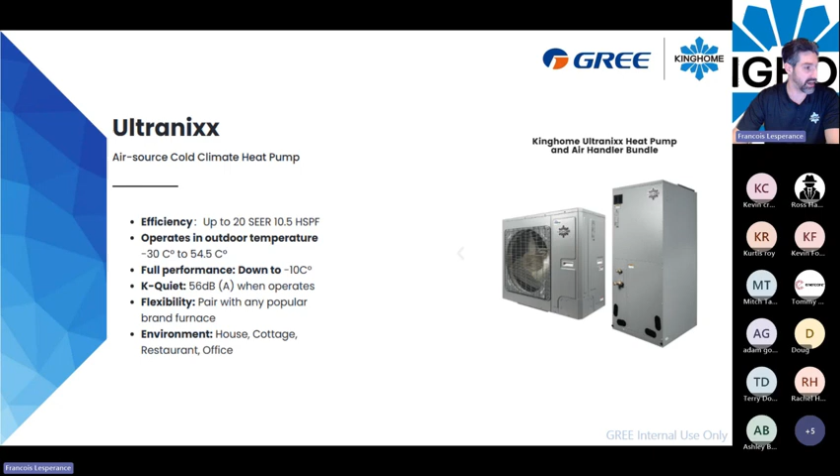So in that heat pump, you have a two-stage inverter compressor, and it's really a good compressor, really reliable. It can go, as I said, to operate like 100% of its capacity at minus 10 degrees Celsius.

This unit is fully 24-volt compatible. So even through your thermostat to the outdoor unit, it will be a 24-volt connection. There's no communication line on this unit. So all you need to connect is your 24-volt wire and your high power wire as well.

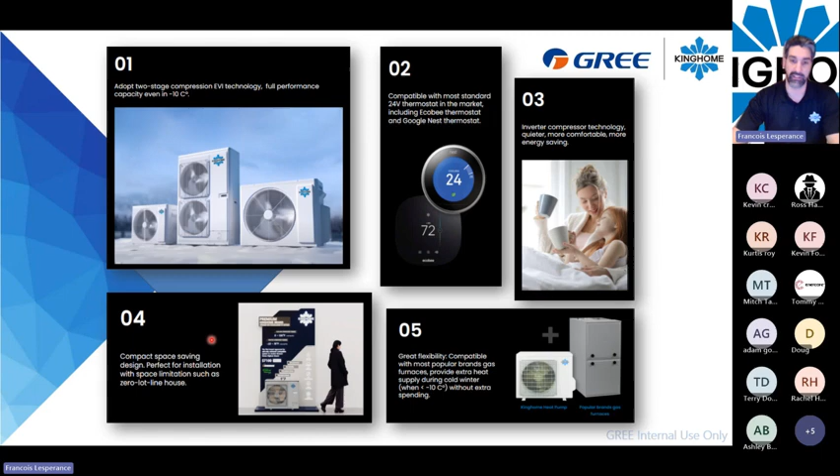And it's compact. It's not like those whole big heat pump systems that you will have on the side of your house. So this one is side discharge, so it will be very flexible, and it's very fun to install as well.

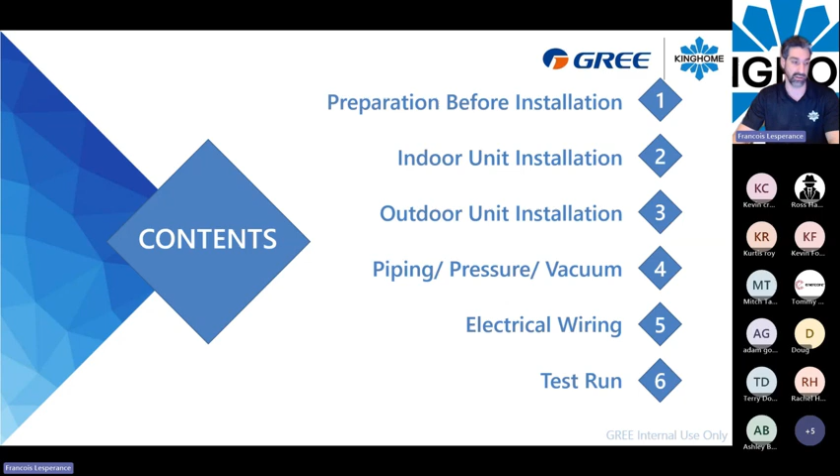So today we're gonna see how to be prepared for your installation. We're gonna walk through the indoor unit, the outdoor unit as well. We're gonna take a small review about the piping, pressure, vacuum, all the stuff you need to do to be done perfectly when you want to do a good installation. We're gonna see the electrical wiring, and at the end of the presentation, it will be a test and run, how to control and make the startup for the unit, how to program all the stuff via the dip switches, and how to make it work correctly.

So first thing first, every time you will do a job, make sure your ductwork and the equipment is compatible with your load calculation. This is according to the ACCA Manual J residential load calculation. You need to match a good load calculation from the house you're about to install the unit in. If it's undersized or oversized, it will surely not be efficient enough in cooling or in heating. Just be sure that you will have the right ductwork, the right amount of CFM running through this unit.

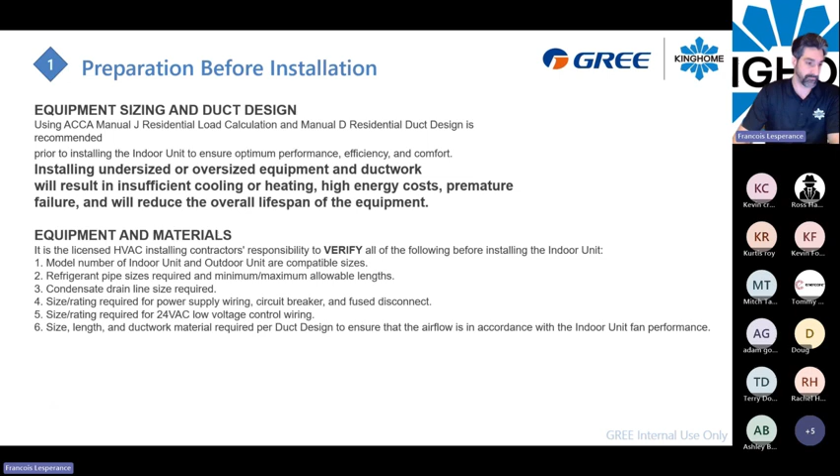So when you are on site, you want to make sure that when you locate this outdoor unit or your indoor unit, you will be aware that the noise will not disturb the neighbor, to have proper ventilation around the unit, to make it a strong and safe installation, away from flammable corrosive gas, away from strong wind. This is the one I want to highlight a little bit, because in heating mode, you just want to make sure that you don't let the wind make the job of the outdoor condenser fan. So just be aware that being away from strong wind is important, away from objects that may generate noise, and high enough to have easy condensate drainage.

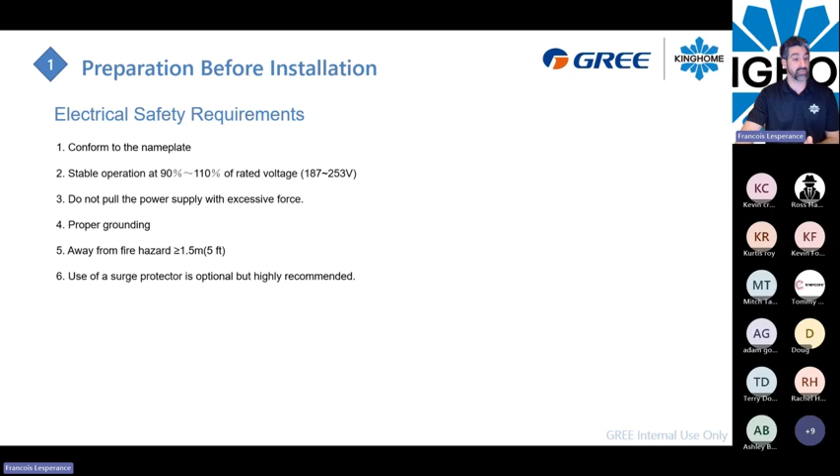When you do your electrical stuff, well, safety is a thing. So always make sure you conform to the nameplate of the unit. You will have a stable rated voltage. It can be as low as 187 to 253 volts, so be sure the voltage is stable. Always make sure you have proper grounding also. This is very important. And the use of a surge protector is highly recommended too.

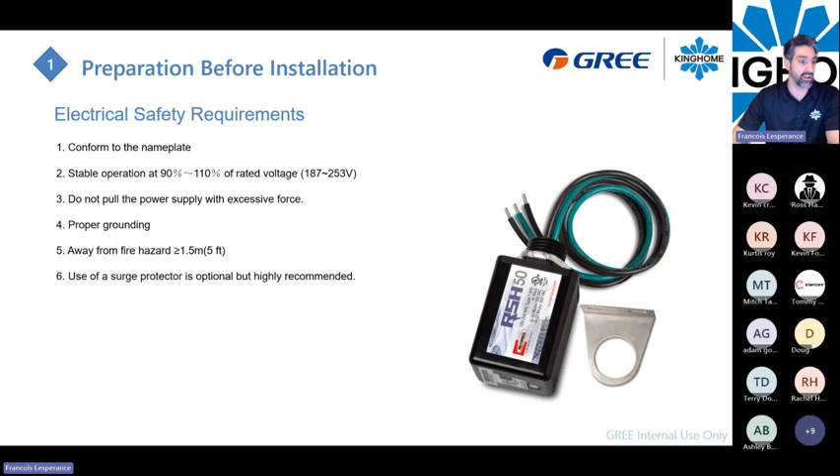You have a lot of electronic boards inside that unit. Maybe the house can be hit by a lightning strike, something that can cause higher voltage. So the surge protector will prevent damage to a board or something like that. So just be aware that a surge protector is highly recommended on all those installations.

We're going to move forward to the indoor unit now. KingHome has an air handler, electric air handler, matching this outdoor unit. You have a selection of units: 2 ton, 3 ton, 4 ton, and 5 ton. You can also match an electric heater to it. If you have a 2 ton air handler, you will have 5, 8, or 10 kilowatt compatible. You cannot install bigger than that. But depending on what kind of unit you are installing, you will match the proper duct heater to it.

You can also see that every size from 2 ton to 5 ton uses the same piping diameter. The liquid line will always be 3/8, and the gas pipe will always be 3/4 for the refrigerant.

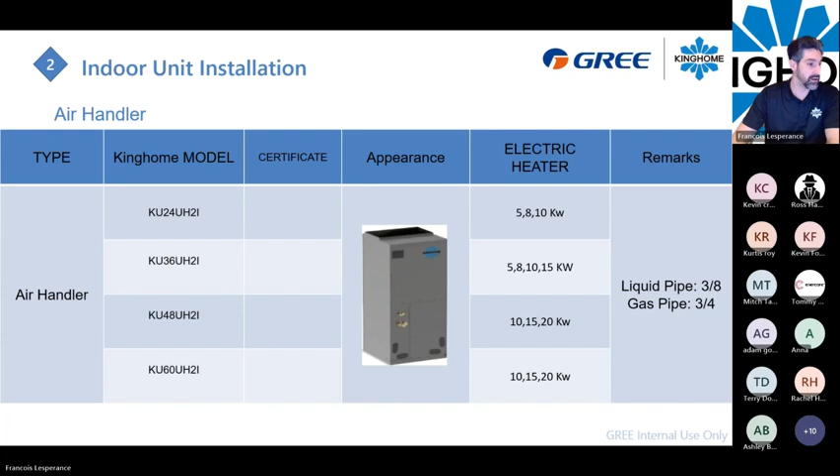So you have 2 different styles for the cabinet, 2 different dimensions. For a 2 or 3 ton, you will have a cabinet that is 21 by 21 by 48. The height will be 48. And if you have a 4 or 5 ton unit, it will be a little bit larger, 24 by 21, and a little bit higher, like 57.

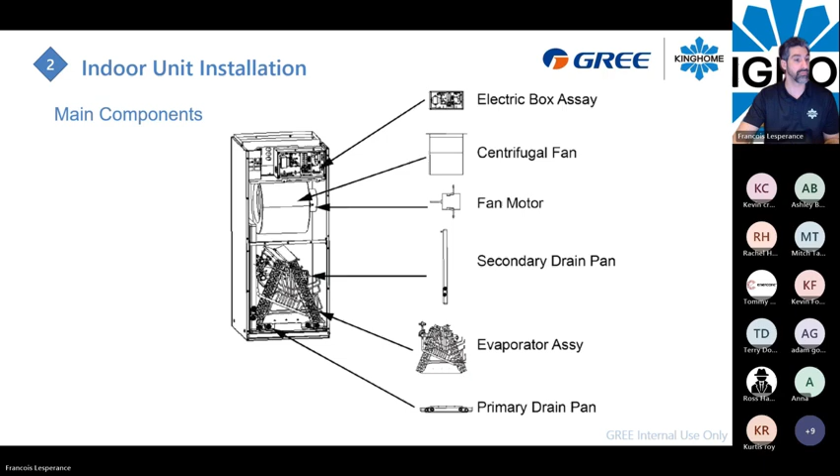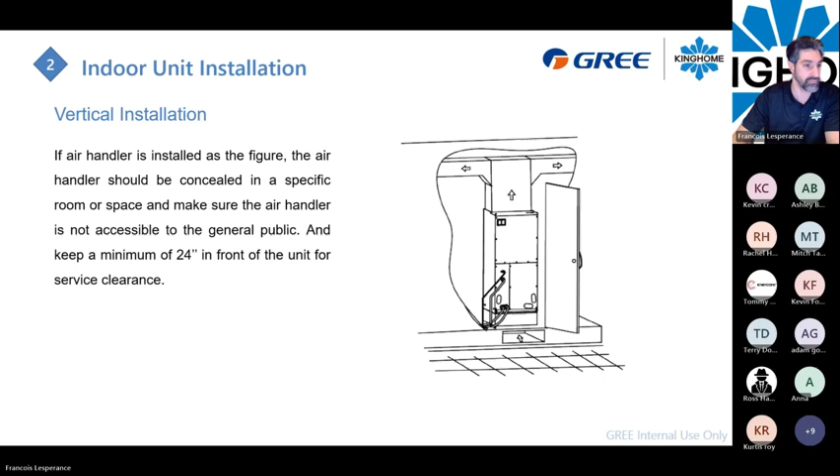Hey, Francois, it's John. Question for you. Are there any baffles that need to be installed for a horizontal installation? Nope, no baffle at all. The airflow will flow through the A coil. So the only thing you have to do is flip the pan.

Okay. Thank you. No problem, sir.

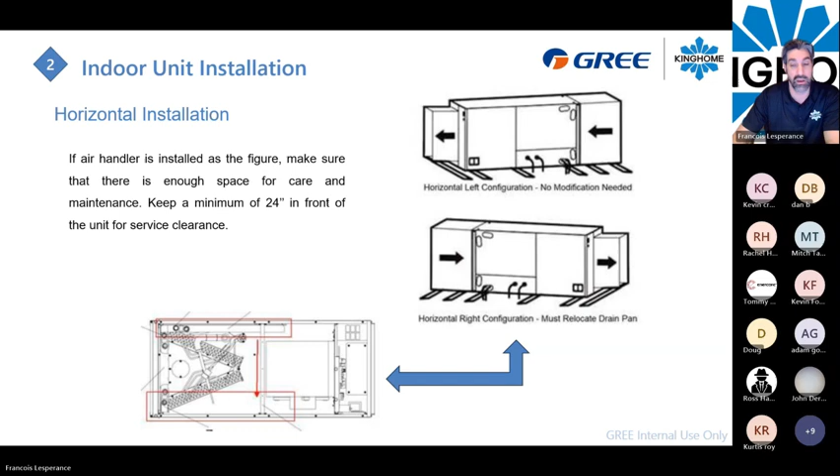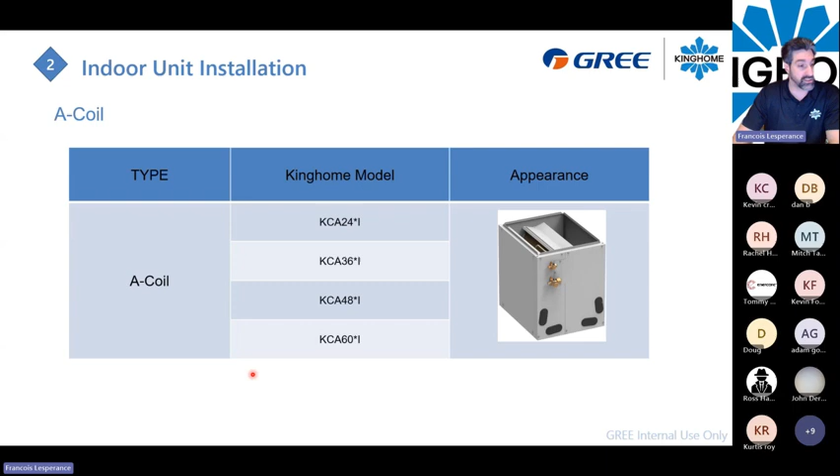KingHome also has cased coils, from 2 ton to 5 ton as well. What's really cool is you will have service valves on those cased coils, and also with the air handler. So you will find service valves at the outdoor unit, but also at the indoor unit. We will talk about it later on, but this is a good thing to know on this type of coil. So 4 different cased coils can be matched with the outdoor unit.

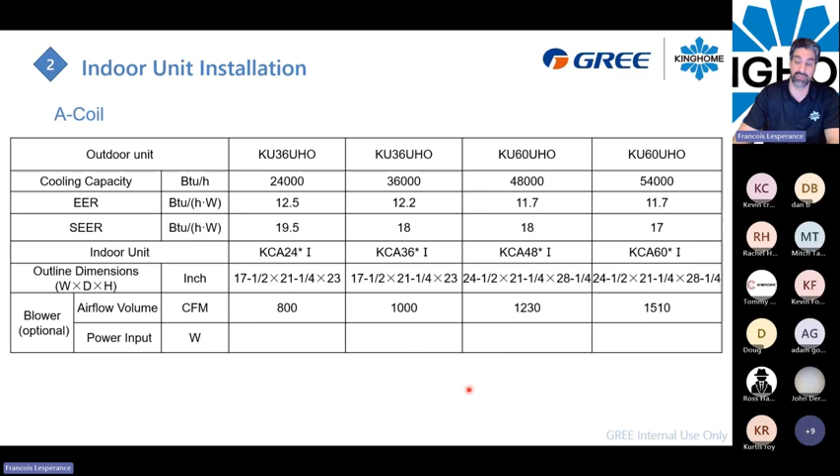So 800 CFM for a 2-ton. You cannot do less than 1,000 for a 3-ton, 1,200 for a 4-ton, and 1,500 for a 5-ton unit. So what's inside of that kind of case coil? So again, there will be two different pans, so you can flip the case coil. So it can be a vertical or a horizontal installation.

And inside of it, you will find a TXV, so a thermal expansion valve. This valve will be managed from the pressure of the refrigerant and the temperature of the suction line, but it will not be electronic, it will be a thermal expansion valve. You will also find, at the inlet and the outlet of this valve, some strainers.

So make sure when you do your brazing to flow the proper amount of nitrogen through it to avoid oxidation in your line, because if you get some oxidation, it can block those strainers. So you have two different strainers in it. Also, you will have some service valves, a 3/8 and a 3/4 for any tonnage, so 2-ton to 5-ton.

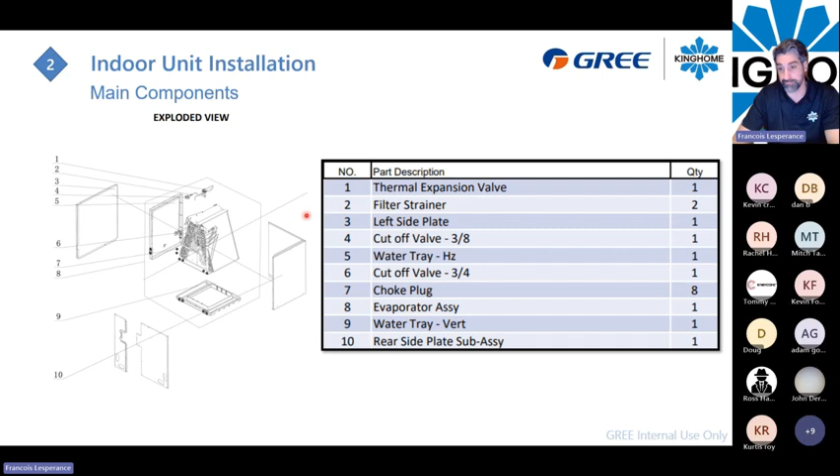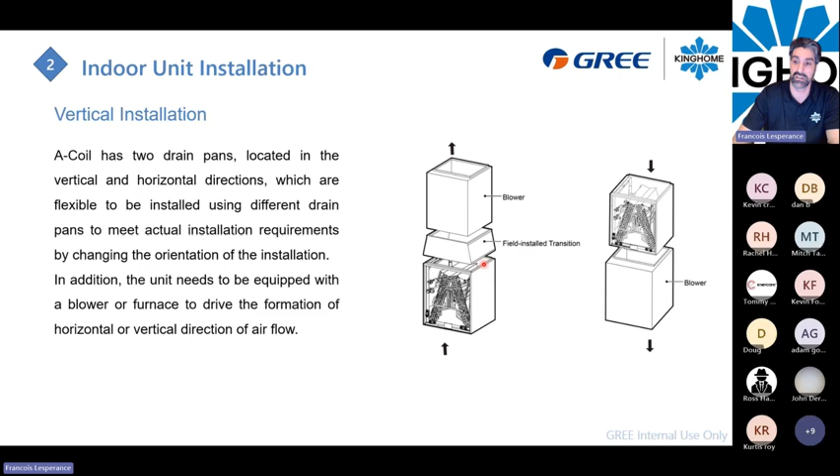And if it's installed vertically, your blower can be above the case coil, or it can be below. In that case of an upflow or downflow installation, sometimes you will need a transition installed to fit with the case coil, but just be aware that you need to fit the dimension of the case coil. If it's a horizontal installation with a left orientation, you don't have to change anything on the case coil. But if it's a right horizontal installation, you must change the drain pan.

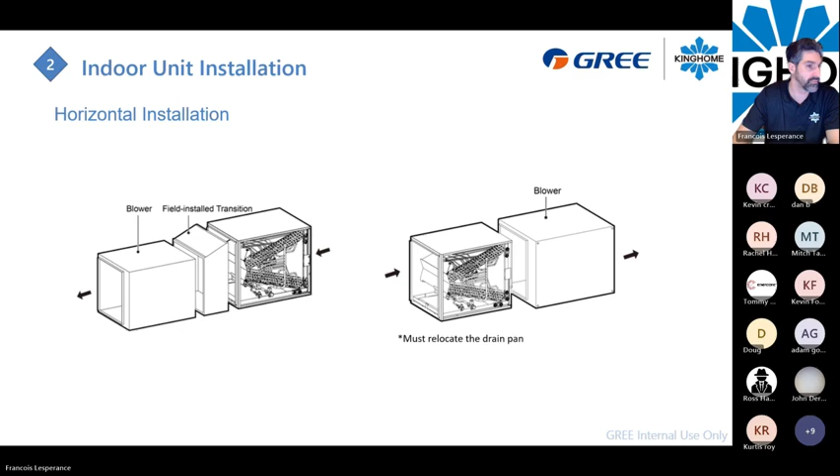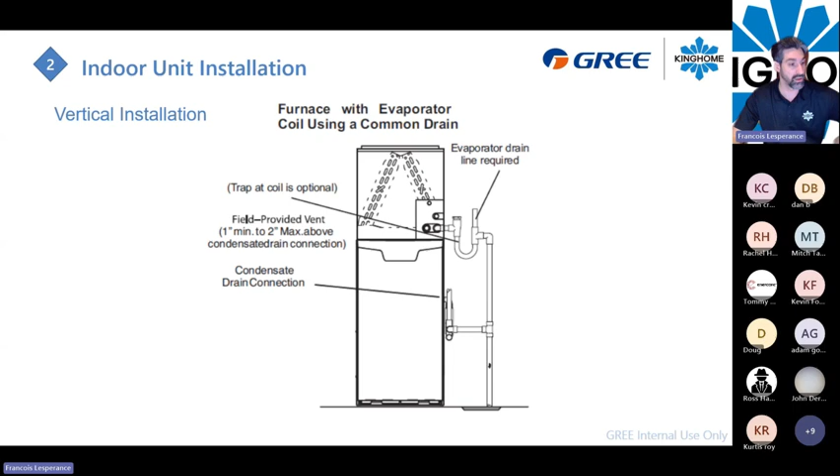Next thing, when your installation is done, an important thing is to take your static pressure measurement. This is a very important thing. You need to know exactly how many inches of water column you have in your ductwork when the unit is installed. If it's an air handler, your A coil will be on the return side. If it's a case coil, it will be in the supply plenum. But at this point, it doesn't matter which one is first, the coil or the blower.

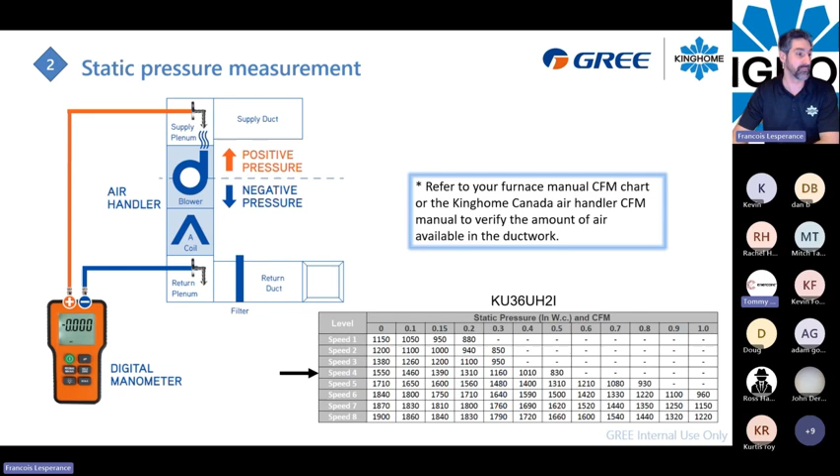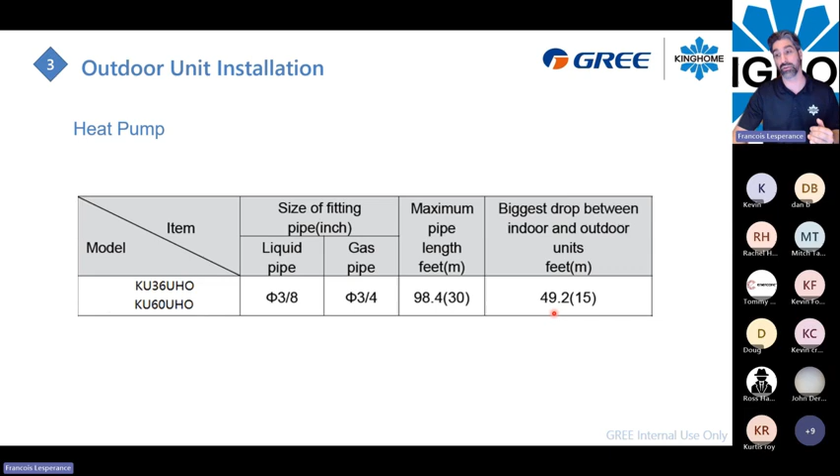We're gonna move forward with the outdoor installation. So as I said earlier, we have two types of outdoor unit. It's called a 3-ton and a 5-ton, but it's configurable as a 2-ton or a 4-ton unit. Either way, piping sizes will be 3/8 and 3/4 for any kind of installation. The maximum pipe length will be 98 feet. And the biggest drop you can have between the indoor and the outdoor unit is 49 feet.

So again, when you install this big guy outside, make sure you will not affect the neighbor in any way. So just make sure you have a good site for the installation. Be sure you have good ventilation all around the unit to make sure you will not recycle the air of the unit. The air inlet and outlet should be far away from obstruction, not too close to the wall. We're gonna see that in a couple of slides.

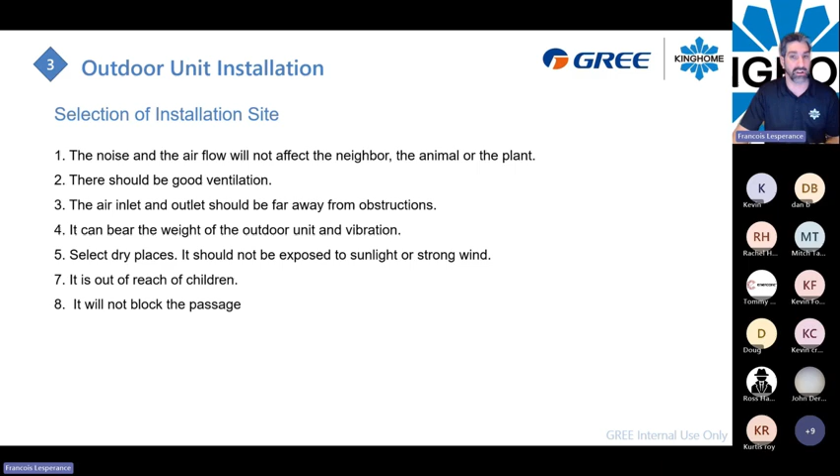Make sure you select a dry place, so you don't have too much water falling or ice on the unit. So typical things you need to watch before you do your installation, also regarding safety. So around this unit, you need to know what clearance requirement you need around this type of unit.

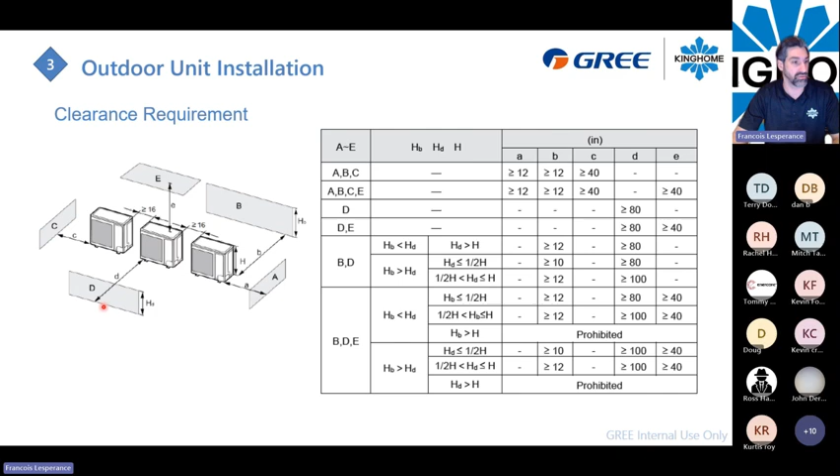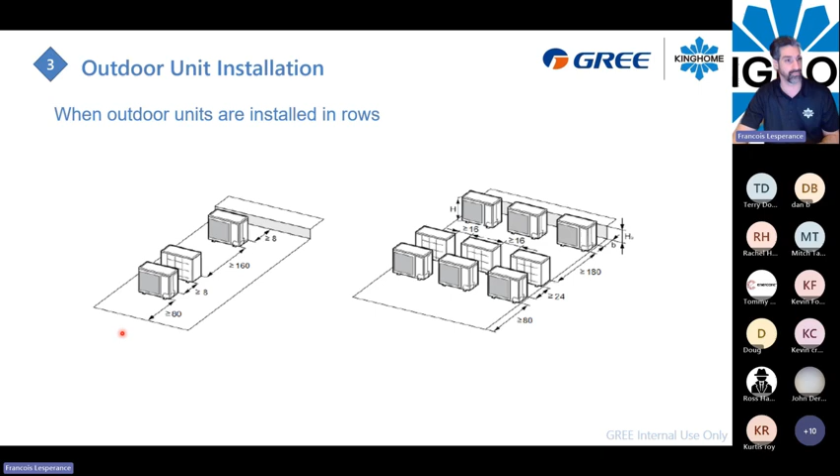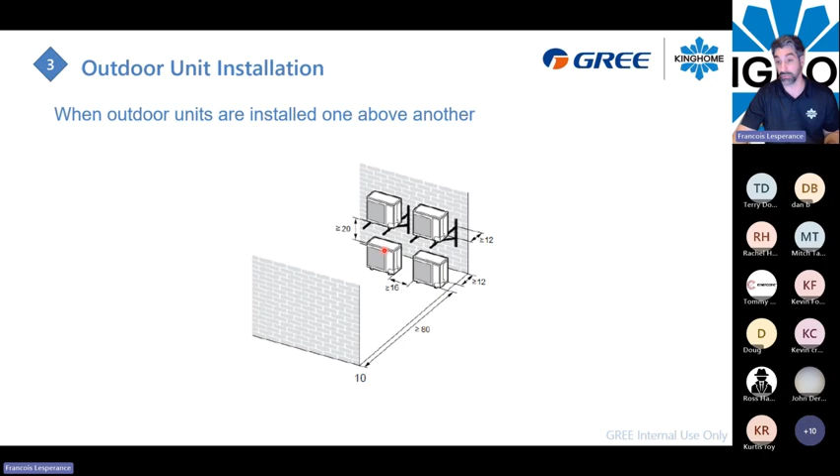Again, make sure the system is higher than the average snowfall in your region. Here in Quebec, everything is higher than 20 inches. So make sure the snow will not block the condenser in any way. You need to provide a rack high enough to manage the defrost, the water coming from the units, and also the snow level.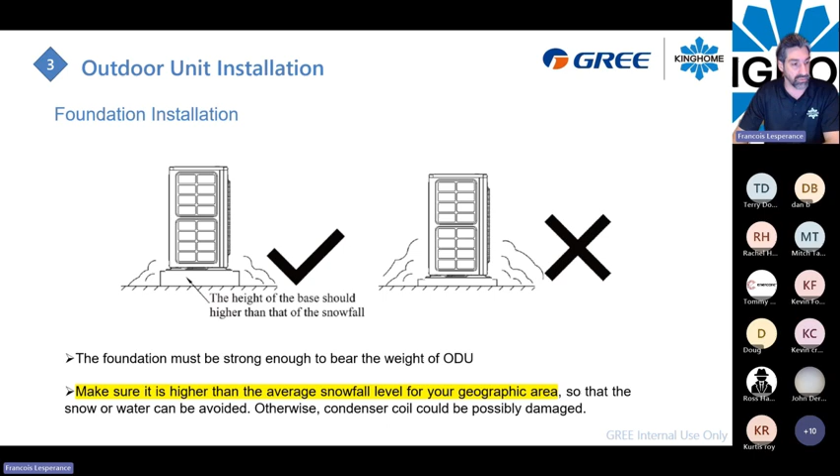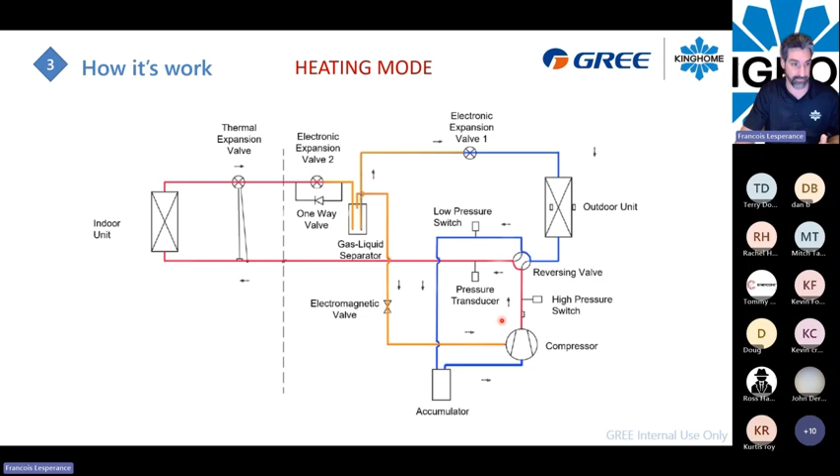And when it's very cold outside, your electromagnetic valve can open and inject some high temperature vapor into it. So that will help the compressor to do its job properly, even if the pressure is going very low on the suction line. The mid-jet port right here will inject some heat and bring the compressor to a good compression cycle. So this is why we can use this system till minus 30 Celsius outside.

Question about that? No, it's good.

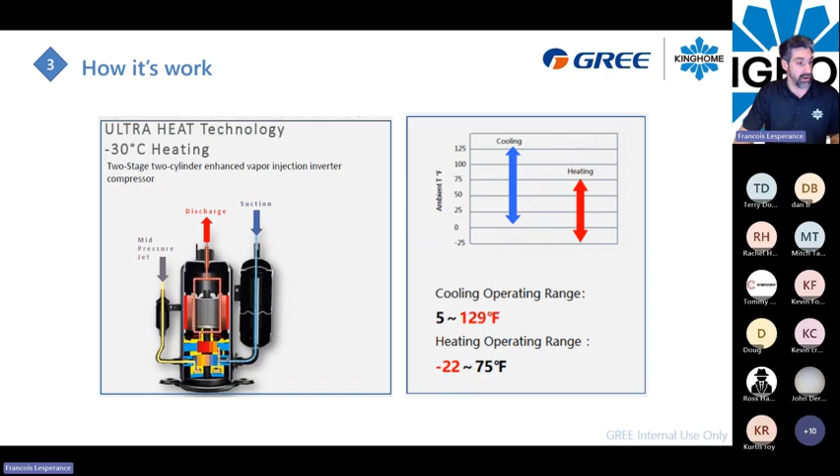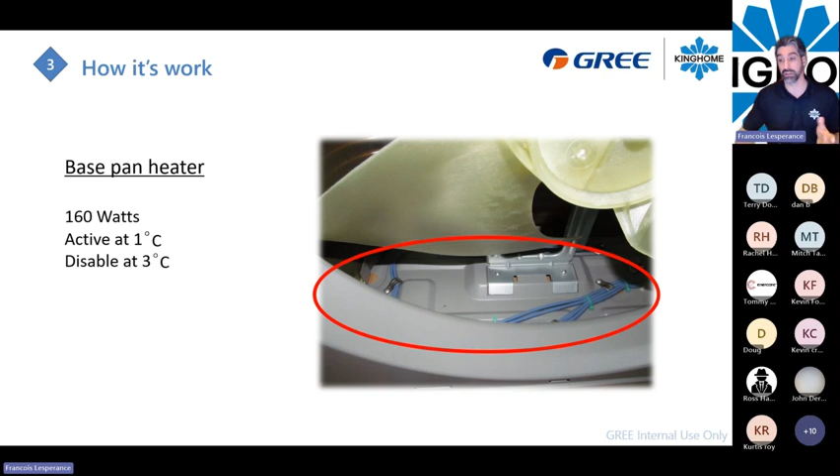We're gonna move forward with just some parts you will find in it. So every unit has a base pan heater. This base pan heater is 160 watts. It will be active from the electronic board at plus 1 degree Celsius and below that. And it will be disabled when you hit plus 3 degrees Celsius.

You can also find some pressure switches. So you will have a high pressure and a low pressure switch. In the case that those open, you will have an error code related to it. But just be aware that the low pressure switch will open if it's less than 7 psi in the unit, and it will close automatically over 22.

The high pressure switch will be open if you are higher than 667 psi, and it will be closed automatically when the pressure goes down to 551.

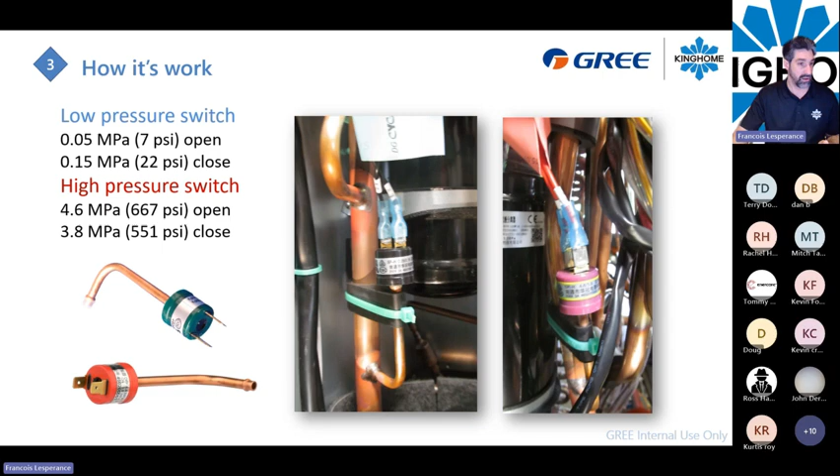Also, in those systems, you will have those kinds of EEV. So we saw on the diagram, you have EEV1 and EEV2. And also in the indoor unit, you will have your TXV. So you will have 2 electronic expansion valves and 1 thermostatic expansion valve. In these kinds of valves, you have a magnet inside, and you have this electronic magnet over it. So the head over the body right here.

This kind of valve will rotate, and you have a small needle inside of it. So the needle can go up and let the refrigerant cycle through it, and then it can be pushed down and reduce the pressure flowing across that valve.

So just be aware that when you see those kinds of bubbles on the piping, those are strainers. So if you have some impurity in the system, if something's blocking, where the refrigerant is not going through the valve correctly, sometimes it's maybe the strainer.

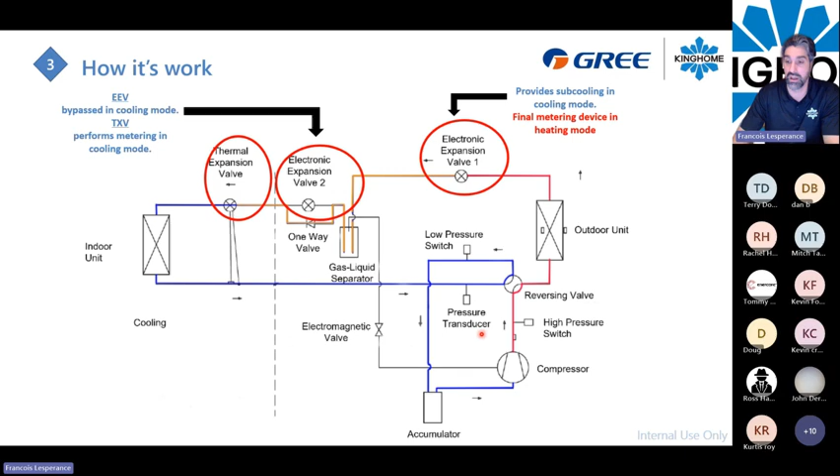On this, we saw the low pressure switch, the high pressure switch, and a part called the pressure transducer. The pressure transducer is located on the suction line, so it will read the pressure in cooling mode, and it will be on the discharge line in heating mode. We use this device to calculate the coil demand.

So if the pressure is very high or very low, the system's algorithm will manage and drive the compressor RPM. In other words, the compressor is inverter, so it can change its capacity. The pressure transducer will be part of managing the RPM of the compressor.

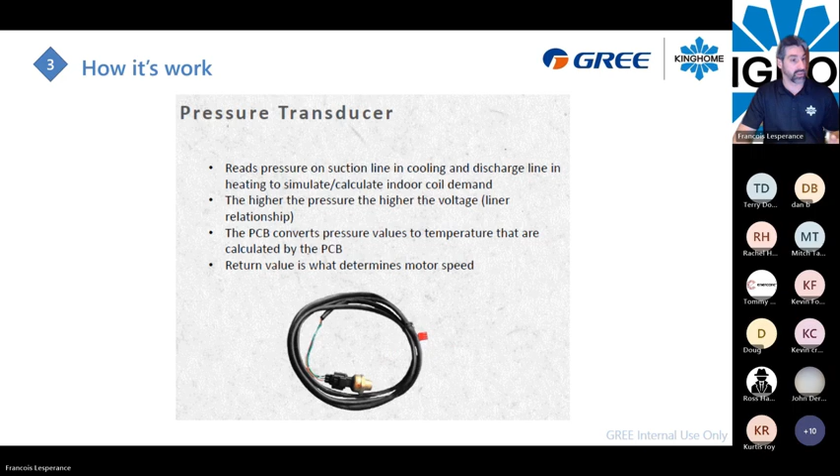Any question? Nothing on the chat? Nothing in the chat, Francois. Good, we're so far. Yeah, crickets. Love the explanation of the injection from the electromagnetic side of it. It's awesome. Yeah, good job, Chris. Yeah, that's great. Thank you. Good stuff, good stuff.

So you already know how to do the piping stuff, but we're gonna review it again, just to make sure. From the outdoor unit to the indoor unit, you cannot go further than 98 feet. And if it's installed on the roof, the difference between those two units, the outdoor and indoor unit, cannot be more than 49 feet.

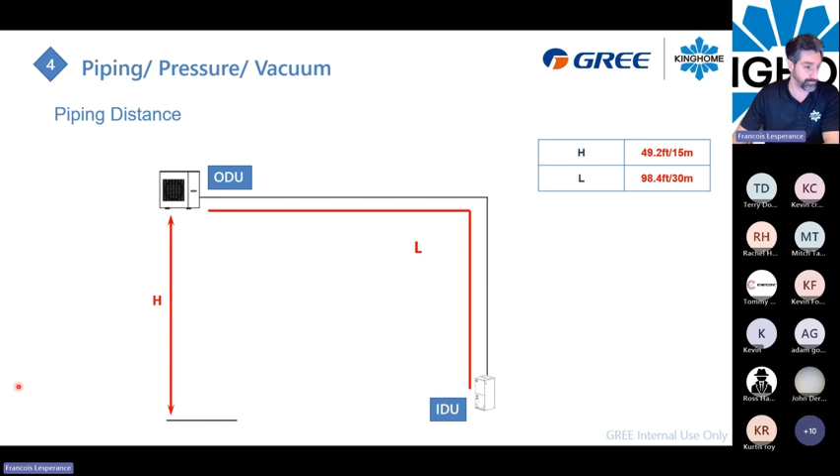Also, make sure when you do your piping to have clean pipes. It's very important to not have impurity in your refrigerant line. So make sure you pay really good attention: if you do a pre-install piping set, flow some nitrogen into it, pinch it, braze it, keep pressure into it, just to keep the impurity from getting inside the piping.

This is really important. When you do your brazing, you need to apply nitrogen while you are brazing the spot, because without it, the heat will create scale, some oxide. You can see the oxide from outside the piping, but it will be created inside of it as well.

So make sure you flow around 5 psi of nitrogen during all the time you keep brazing your piping. You need to flow the nitrogen always when brazing the piping. This is really, really, really important.

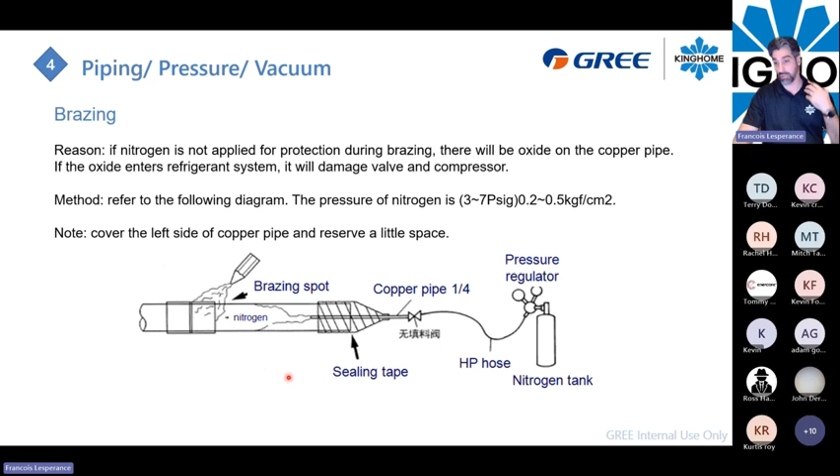Now any kind of unit has a strainer. Already talked about it - you will have a strainer, you will have an EEV. Those EEVs have a small needle hole that manages the refrigerant flow. So if a scale from brazing detaches and flows with the refrigerant, it can block any kind of valve, or block the strainer, all the things.

This is a picture of what it looks like. When you don't flow the nitrogen, you will create oxide, some scale inside of it. You can see outside of the pipe what it looks like - everyone saw that - but it's doing the same inside the pipe.

When you flow nitrogen, you will see from the outside of the pipe the same kind of flux and welding on it, but inside of it, it will be clean - very, very clean, no oxidation at all. And then you will protect the system like this.

The refrigerant will act as a kind of solvent, so it will dissolve and powder the oxide. You will not see big chunks of scale in the system - it creates just small powder, some residue. That kind of residue, maybe not from the start, because the strainer will hold that kind of powder, but if it hits the EEV, it will be really hard to service the unit, and that will cause you big trouble.

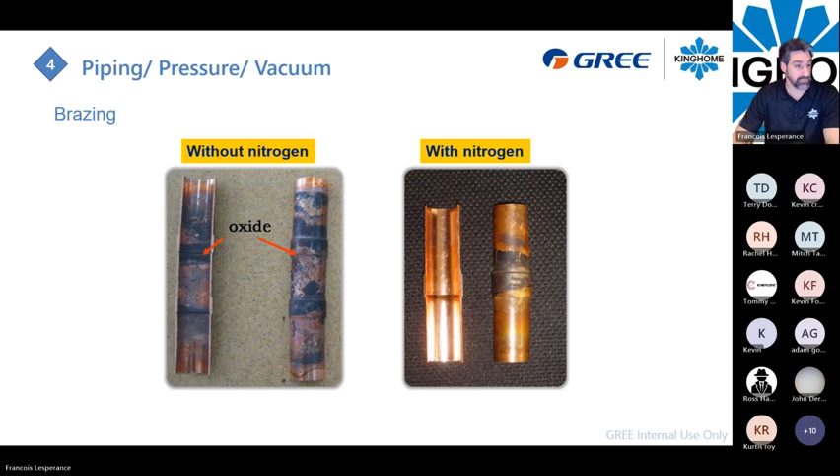The unit comes with some kind of already flare connection, from the outdoor unit and the indoor unit, so you can use those connections. It's already flared - you can just connect directly on the service valve right here, and then you will have to do a brazing connection right here. So again, flow your nitrogen - it's really important to make a good connection right here.

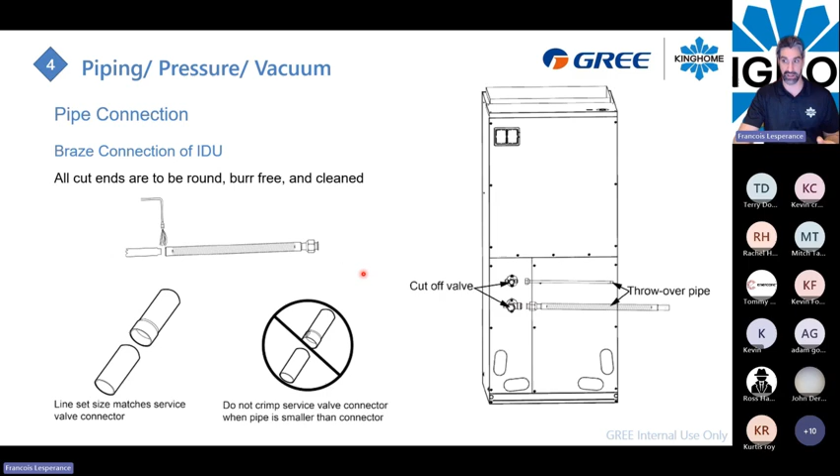So from the outdoor unit, if it's a 2-ton unit, the connection is inside the unit. You need to remove the panel to make a good bend of your piping right here. This is why the connection is already twisted a little bit. That will help you make your bend and move the piping out from the corner panel.

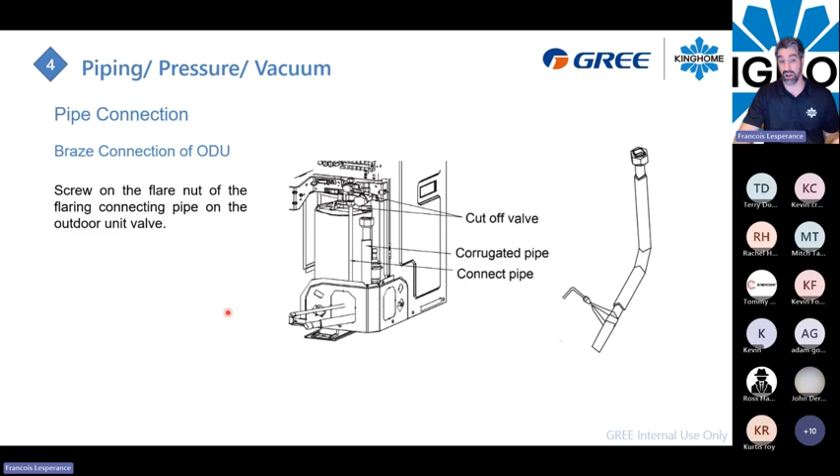But make sure you make a good connection here. Use your torque wrench also. This is really important, so make sure you make a good flare connection. You can apply some compressor oil or vacuum oil around this outdoor section here of the flare, just to make sure you remove the friction. So when you use your torque wrench and another Wescott or spanner to hold the second part of the piping, you don't want to make it twist on the flare. You need to make it a smooth connection, very compressed, very hard.

If you apply a little bit of oil directly onto the piping, that will help reduce that friction. Also, when you do your piping, just make sure the piping is not really tightly attached to the house or the wall or anything, because this kind of unit you will use in cooling mode and in heating mode. So you can have a lot of movement from the piping, because when the copper catches some heat it will expand a little bit, and it will contract a little bit when it's colder.

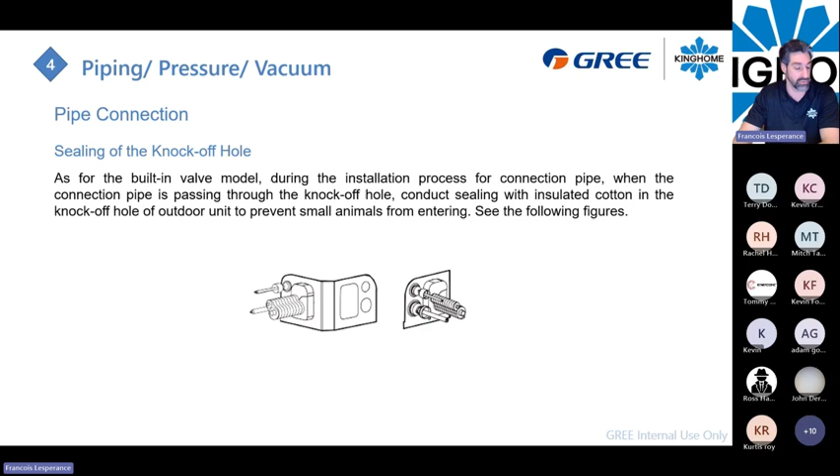So, leak test. As I said, you will find a service valve at the outdoor unit, and you will find a service valve at the indoor unit, even if it's a case coil from KingHome or an air handler. The thing is, inside the case coil or the air handler, there's already a small amount of refrigerant, like half a pound, like 9 ounces, something like that. So a half pound of refrigerant is already in that indoor coil.

So you just need to make a good leak test and a good vacuum into your lines only, one for the liquid line and one for the gas line, the vapor line. You need to provide your leak test with around 500 psi of dry nitrogen, and your pressure must hold for about an hour. Just make sure you don't have a leak in it. You can also use soap just to make sure you won't see bubbles, you won't see anything from your flare connection.

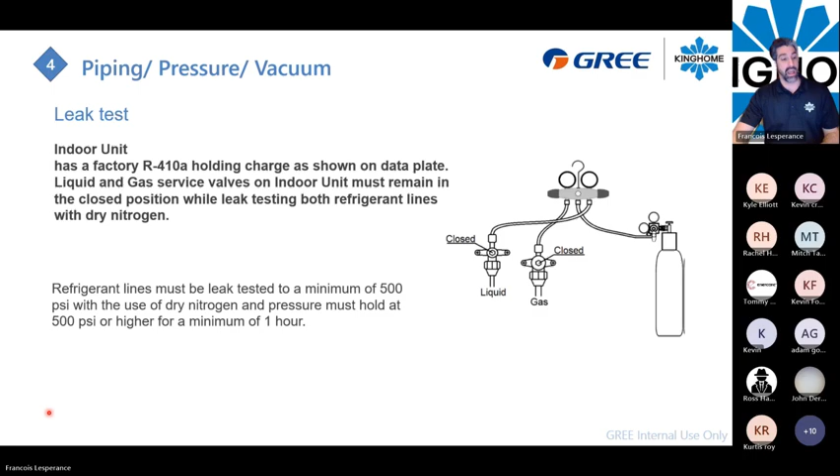When it's done, you can remove your nitrogen from the system. Make sure you don't have any leaks, and then you can perform the evacuation, the vacuum.

You will attach your vacuum pump, and then you will need to make 2 different vacuums, one for the liquid line and the other for the vapor line, because the coil is already holding some refrigerant in it, so it's not communicating from one line to the other. Make sure you do 2 different vacuums for each line, because you only vacuum your own line, so it won't take you a long time to make a good vacuum.

Make sure you attach your micron gauge. You will reach your 500 microns, hold it for 15 minutes. When it's under 1,000 and stable, then your system is dry and there's no leak.

So you can go and open your refrigerant line. You will have to open 4 service valves to make it work properly, 2 from the outdoor unit and 2 from the indoor unit.

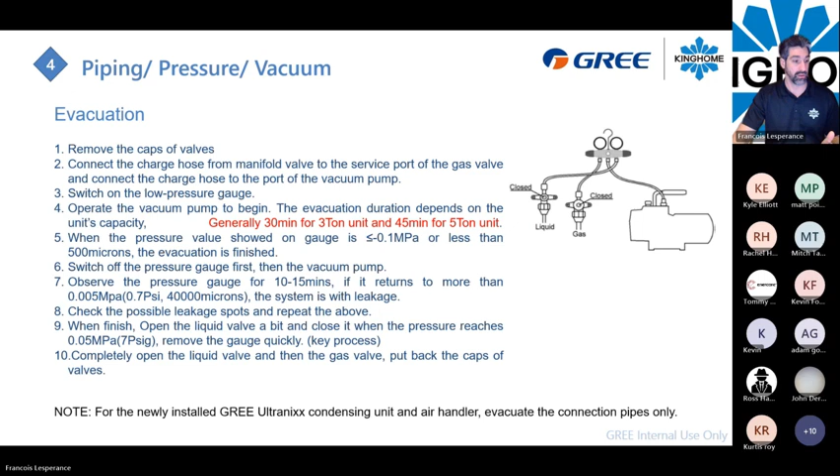Hey, Francois. Do you recommend maybe cracking the indoor service valves first? Is there a particular one you prefer? Should we open when we're ready to release the refrigerant, the indoor first then the outdoor, or the outside first then the indoor? Doesn't matter, it doesn't matter.

What matters is you need to open the liquid line first. Make sure you push enough liquid into the system in the first part, because if you open the vapor line first, sometimes, not every time, but you have a risk that because of the pressure drop, you can suck some oil from the compressor. So always open your liquid line first, and what can be done is you can make a cycle: liquid line from the outdoor, then open the indoor valve, and finish with the suction valve at the outdoor again, making a full circle.

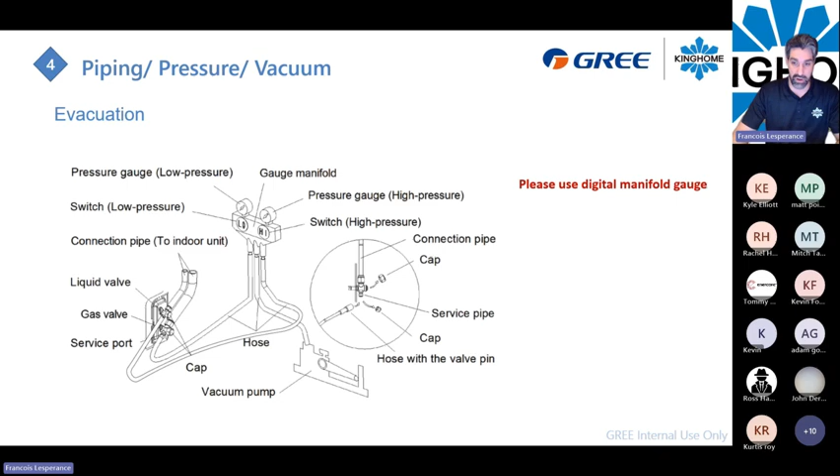Another tip and trick you can do is just crack the valve a little bit and close it already, just to apply some pressure into your pipe, and then you remove your gauges at this point if you don't want to lose too much refrigerant. Or if you want to run your tests and everything, you can leave it there. But the thing is, you can open the liquid line from the outdoor unit first and then make it cycle. Just be sure you open all 4 valves at the end.

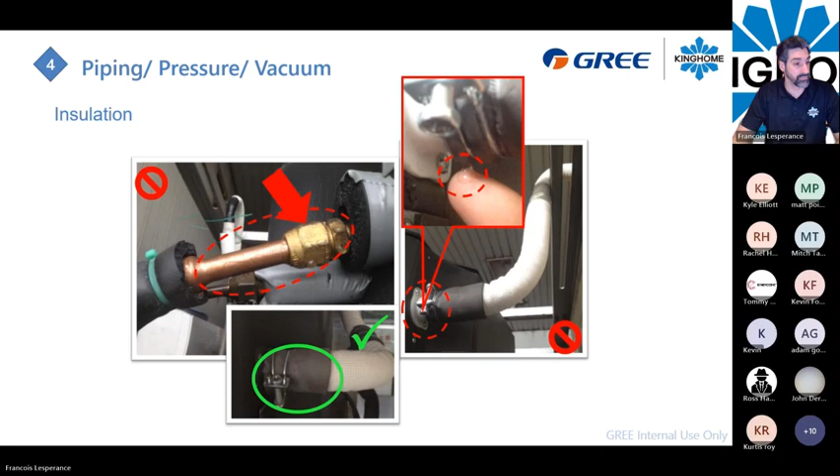So on the outdoor of the valve here, on this picture, this is an example of a 4-5-ton unit. For this kind of unit, the valve is outside, but the 3/8 is not insulated, and you will push your Armaflex as far as you can go on the valve here. So at a certain point, yes, this valve may condensate, but it's a normal thing when you are in cooling and this valve is outdoor.

But just remember, you will hit the same kind of valve on the indoor unit. So just make sure, if you have like 3-4 drops of water below the valve here, it's normal. You can add more Armaflex, or you can isolate it as well. But just be aware that it is normal for the system to condensate on the suction line here at this point.

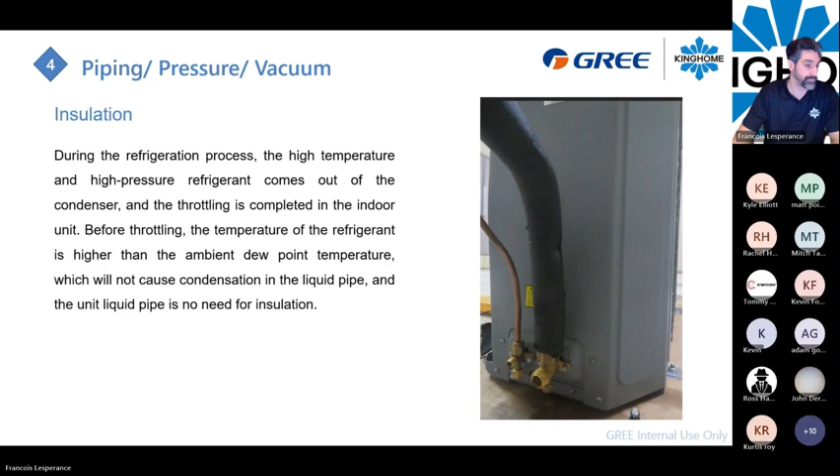Any question about the piping and all the stuff we've seen so far? The chat is clear, Francois. So nothing in the chat. Okay, I think you're good. That's great. Actually, Tommy, sorry, I did have something in the chat. It's just not sending for some reason.

So back a few slides ago, it says digital gauges. Is that mandatory? Well, I wouldn't say mandatory. It's better. We are in 2024 now. Digital gauges are awesome. You can also now have your temperature probe on it. It's a thing. The industry is moving forward.

Now they are good. I used mine back in the days in very cold weather outside, and it always worked perfectly. I have more reliability in my digital gauges than the one with the needle. So yeah, I hope everyone will move forward and use digital manometers.

Okay, so now we're going to talk about electric connection. Are you guys going to install some of those air handlers in your region? Do you install electric air handlers or not at all? Very little, maybe 5%. Mostly I'd say 95% gas and maybe 5% air handler. So not too much, but we can touch on it a little bit. Yeah, I will just not take a deep dive into it, like the heater and all that stuff. If you have some questions, I have all the slides on it.

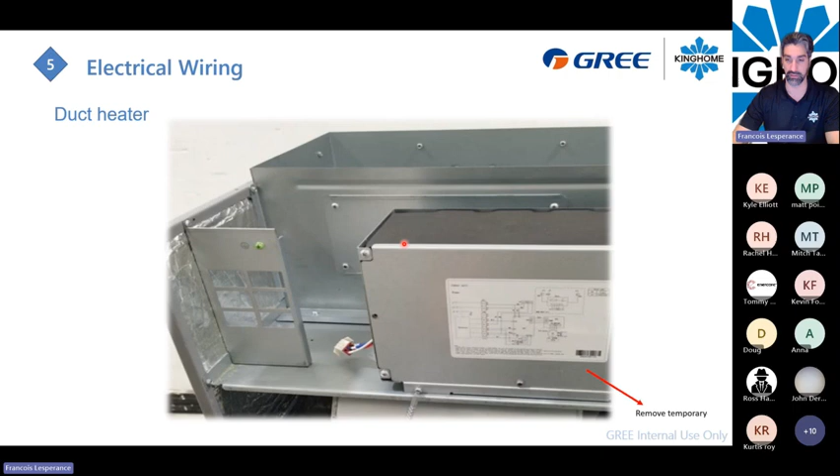So if you need to install a duct heater, you will need to remove this box temporarily. You have two screws holding it. That will give you enough space to access the back plate. You can install your duct heater, and behind the cabinet here, you have two little holes to push the bracket into, to make sure the duct heater is not swinging in the supply duct and make it stiff and hold correctly.

Then you will have to replace your screws. Then you will install the breaker. The breaker comes with the duct heater. If it's a 5 or 10 kilowatt, you will have only one breaker. If it's a 15 or 20 kilowatt, you will have two breakers side by side. And to make that connection, you will use a single point connection.

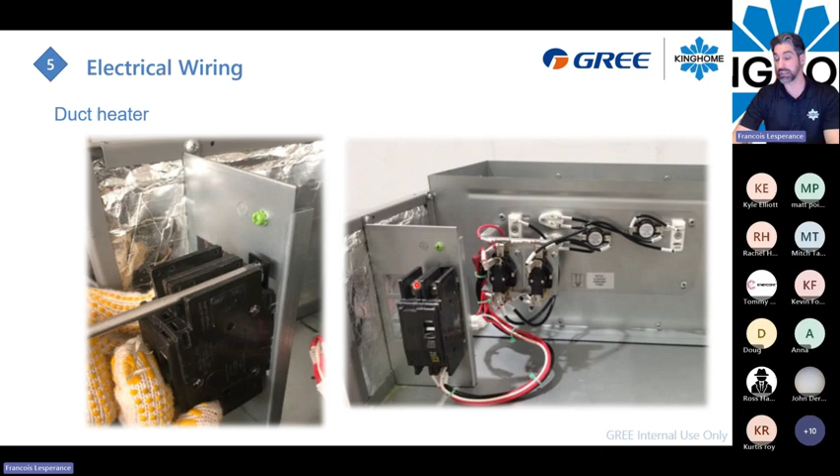So before that, if you're using only one breaker, for example, you will have to connect this white Molex connector. So in a case that you don't use the heater, you will not plug anything on this one. But in a case you use one, you will have to connect this plug together to make it work correctly.

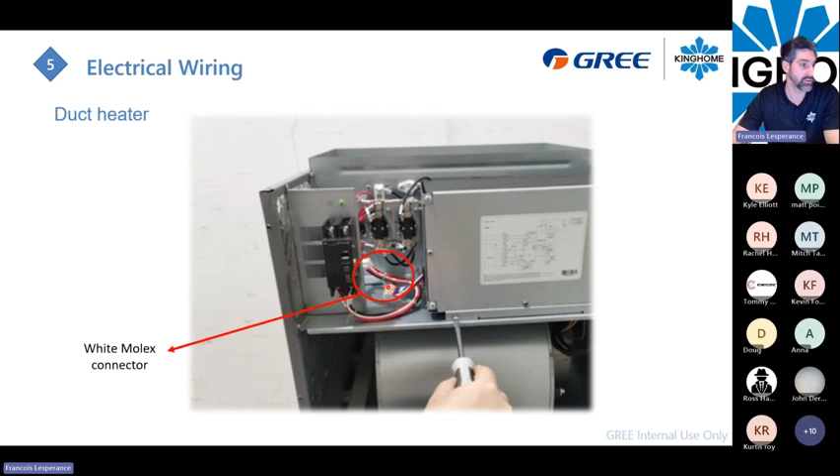When you attach a single point connection, you will have to remove this small piece of metal here on the plate right here. You need to make sure your breakers are side by side and touching together to make a good connection with the single point here. So now in a case that it's, for example, a 20 kilowatt, like most of the Quebec installations here, you need to provide a big wiring on those screws here to make sure you power the unit correctly.

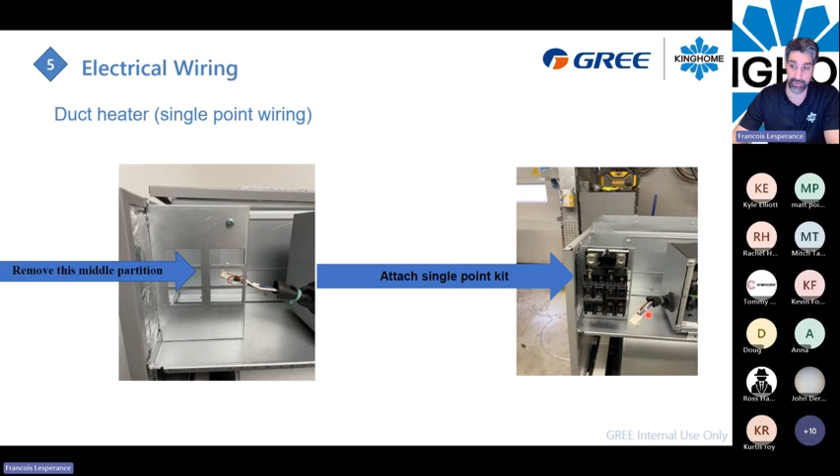So by the white Molex right here, the 240 volt is already powered passing through the breaker here. So you don't use anymore the L1, L2 connection right here. You don't have to. There's already a wire going from the breaker to power up the board and all the stuff for the unit. So when you're using a duct heater, you don't have to use the L1, L2 connection here.

And again, you will have some space behind the panel, the box right here. So I highly suggest to use the knockout hole from the side of the unit and not the one from the top, because maybe at some point you will need to access the top panel here.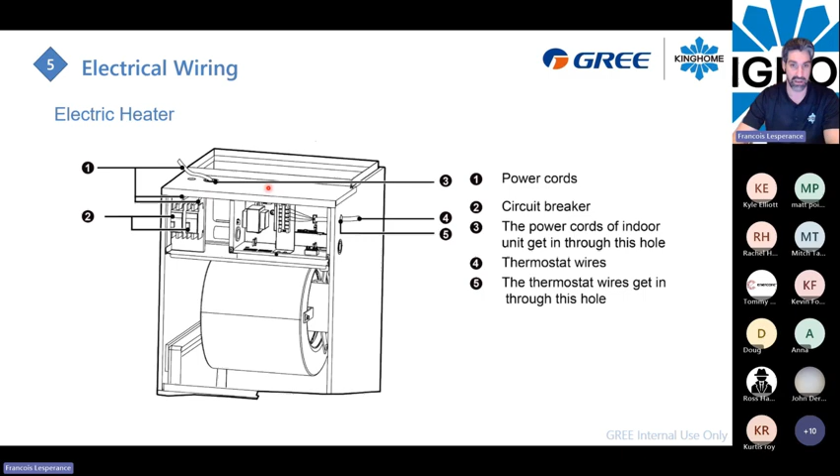So for the outdoor unit, the power will be, again, L1 and L2. Maximum fuse for a 2 and 3 ton system will be 35 amps. So a 30 amp breaker with a 10 gauge wire is good enough to make your installation. And for a 4-5 ton unit, the maximum is 45. So you will use here a 40 amp breaker with the number 8 wire gauge, that's big enough to make your connection here.

So when you do your connection, it's good to have a good and solid connection on your L1, L2. If you use some spade connection, that's better. If you just lay your solid wire like this, make sure you have long enough of that copper wire here to make a good connection for your L1, L2, and your ground as well.

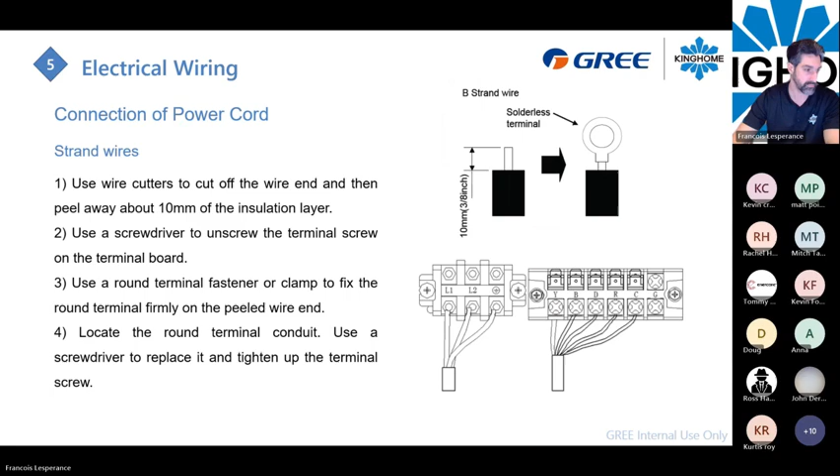For the low voltage connection, it's highly recommended to use stranded wire. But if you have some solid wire, because it's only a 24 volt connection, again, make sure you make a good contact here with the copper to avoid any electrical problem with the system. So this is what the terminal strip looks like. So for the power, your L1 and L2, you will use your disconnect as well. You can use your surge protector on your disconnect or directly on the power line somewhere else.

And then the terminal block for the low voltage looks like this. So you have your Y terminal. This one will control the compressor signal. You have a B terminal right here. This activates your four-way valve in the heating mode. So you need to configure your thermostat to be active in heating mode for the four-way valve.

The D connection right here is an output signal for the defrost. So in a case that you will need to enable the furnace or your duct heater during the defrost of the outdoor unit, you will need this D connection. Otherwise, if you don't want to provide heat during the defrost, because the defrost cycle is very short and you don't have to apply any heat during this time, the D connection is optional.

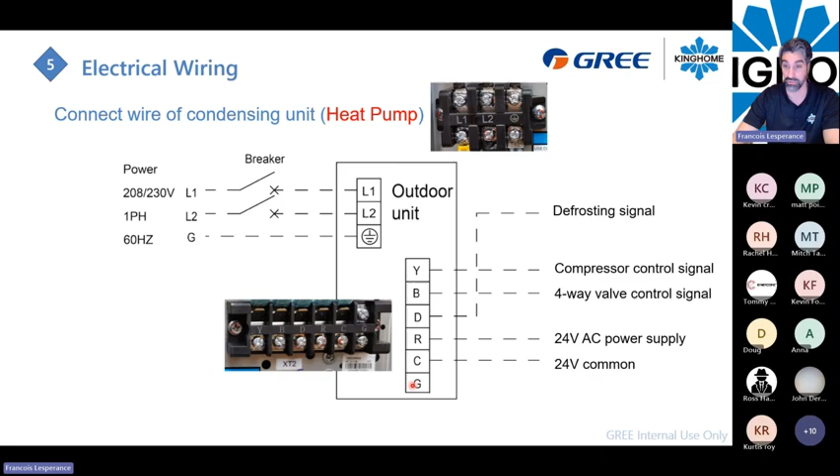Make sure when you get the wire across the cover panel to use the proper hole. So one hole for your high voltage line and another hole for your low voltage line. Make sure you're not passing through the same hole. You have access from the side, you have access in the front, and you can have access from the back too. So multiple ways to install your wire to make sure you have a proper connection for your L1, L2 right here and your low voltage connection just beside it.

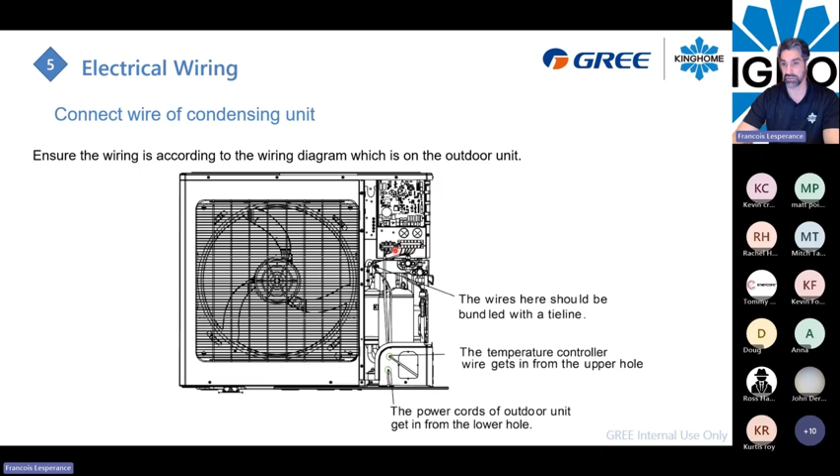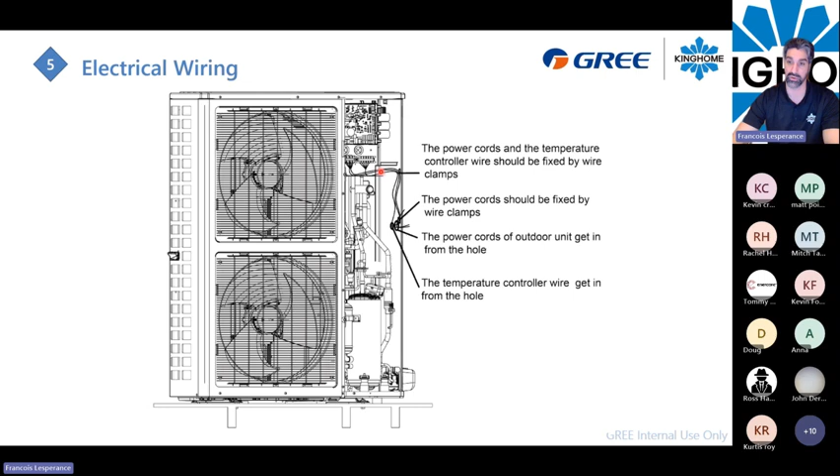On a 4-5 ton unit, the unit is taller because we use 2 condenser fans, but the hole can be found here somewhere in the middle of the height of the unit. So one hole for your high power and another for your low voltage connection.

I built up this kind of diagram to use it as a reference. So in that case, we use an Ecobee thermostat. So from the thermostat, you will use RC when talking about Ecobee. You won't use RH. I know new kinds of thermostat from Ecobee only use the R. There's no more RC, RH. You just have one R. But in the case that you have both, well, you need to use the RC.

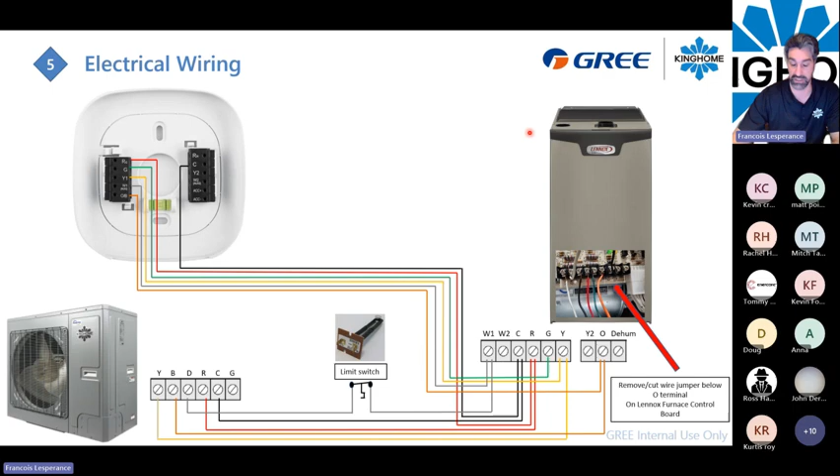So just a little bit of security things here. Make sure everything is connected properly. Your high and low voltage wires should be led through different rubber rings. So make sure you don't bundle the thermostat wire, to not create some kind of error. High and low voltage must be separate. And make sure the wire is held properly. Sometimes you can add some clips to hold the wire correctly.

Make sure you have a proper ground too, from your furnace and from the outdoor unit. The ground is really important. You don't send communication to the outdoor unit, but inside of it there's a lot of communication because the compressor is inverter. It will be driven from a kind of back and forth communication. So you need a proper ground to make it work correctly. And always use your local and national rules about the power and the connections.

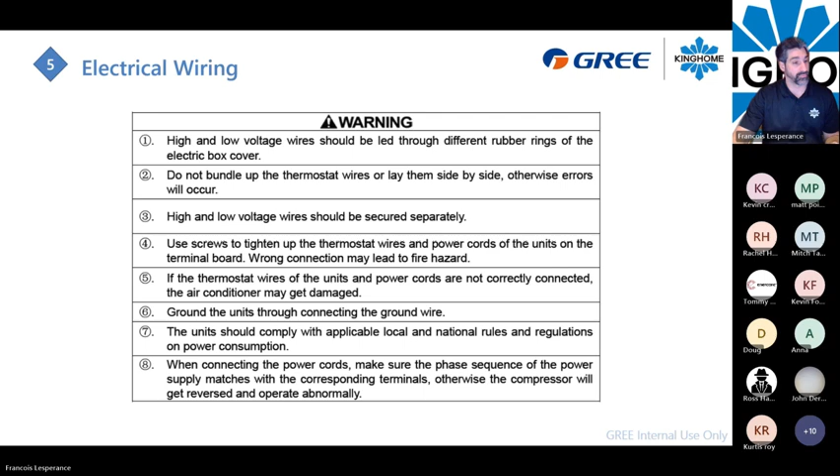We're going to move forward with the test and run, the startup operation. Any question about the wiring?

Actually, I got one question. When we're running it, you said just run a 15 amp to power the indoor unit. How much increase is it if you add those heaters? Do you have to run a new wire or will it still operate on the 15 amp? No, 15 amp is only when you don't have a duct heater. If you were to add the biggest one, I think you said was 20? Yeah. 20 kilowatts. So what would that be in amps? What should we be running? 100.

100 amps? Yes. For 20 kilowatts, you need a 100 amp breaker. Okay, so then we're not running that. We're just gonna do the 15 and we're done. Yeah, if you don't use any kind of duct heater, you can use only a 14 gauge 15 amp breaker, because the only thing you power here is the fan and the electronic board. It will consume maybe 3 amps. It's very low.

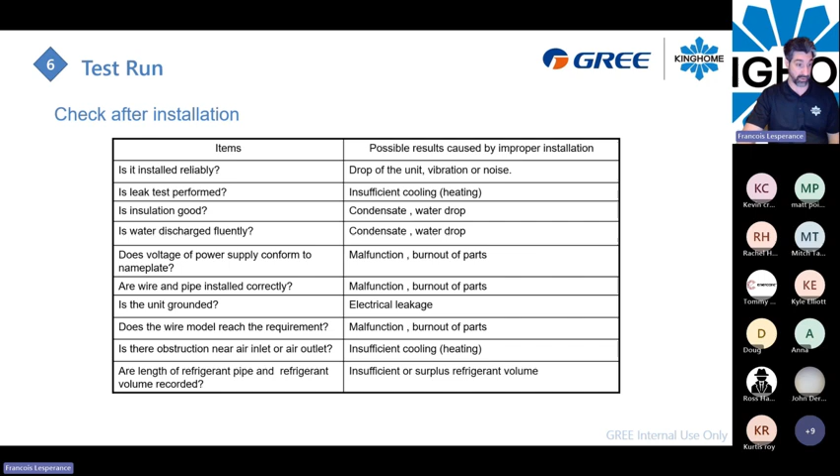In this unit, the outdoor unit, you will have some dip switches to configure regarding what kind of installation you did. So for example, we call the unit a 3-ton or 5-ton, but it can be configured as a 2 or a 4, depending on which cabinet you're using. So for example, we're talking about a 3-ton unit. By default, it's configured as a 3-ton unit.

If you have installed a 2-ton cased coil and you want the outdoor unit to act as a 2-ton, you will need to move dip switch number 1 to the off position. So dip switch number 1 will act as your capacity dip switch. By default, it's set on for this kind of cabinet right here. If you need a lower capacity, you will need to put it off.

For the other cabinet, like the 4 and 5-ton, by default it's on to act like a 5-ton. If you need to make it 4, you just push it off to make it 4. So that's dip switch number 1.

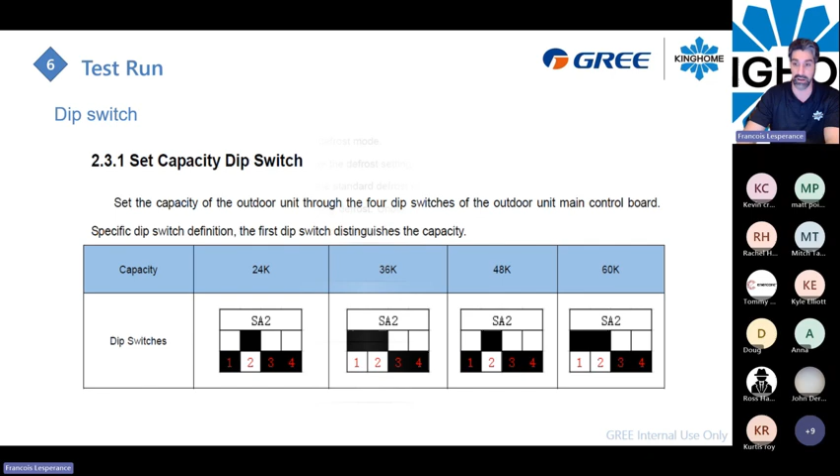Dip switch number 2. So this is the same block here, but we're just moving to dip switch number 2. It's your defrost mode switch. So if we go back here, you can see your dip switch number 2, by default it's on. So for a 3-ton or 5-ton, by default it's on. On means standard defrost. So the algorithm of the unit will use standard defrost, depending on time, temperature, all the stuff to make the defrost happen. So it will be by default, so you leave it on.

If in a certain case you have some ice built up in the unit, and you have some difficulty removing the ice and snow from it, you can make it a strong defrost. So just put the power off, wait 15 minutes, then move the selection of your dip switch here, put it off. That will make the system go into a strong defrost. So it will do the defrost more rapidly, and you have more chance to remove that ice and snow stuck in the condenser coil.

The two last ones, the 3 and the 4, are for operating mode. So by default, they are off, meaning it's standard mode. In standard mode, the system will act as it's supposed to, no questions asked. If you need more power from the unit, quicker, you can set it as strong mode. So by flipping dip switch number 3 on while number 4 stays off, that gives you strong mode.

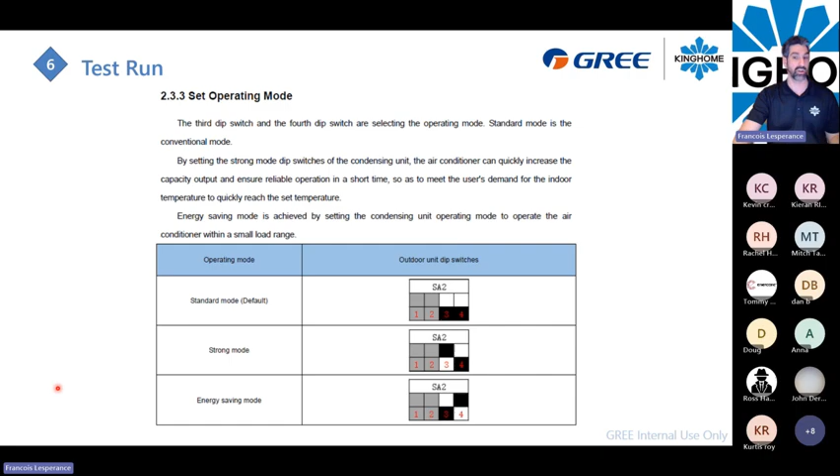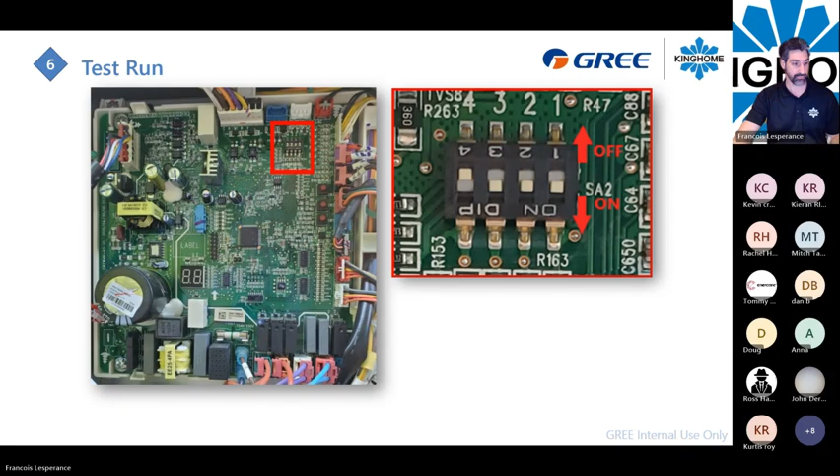That's it. This is all you need to know about the dip switches when you will do your startup. So make sure...

When you are in cold weather, when it's really cold outside and you've done your outdoor installation, don't be afraid to apply power on your L1, L2 on the outdoor unit before even you finished your piping, just to make sure the compressor will be warm enough to make a proper startup at the end of the day. This is really important.

You need to activate that heating belt of the compressor during the day when you're installing the system in cold temperature outside, just to make sure you will not slug the compressor at startup, because liquid refrigerant will stack into the base of the compressor, and if it's cold, you can damage the compressor directly from day one. So you need to warm up the system a little bit.

So if you touch it with your hand on the shell of the compressor and you feel it warm, you're good. Make sure to apply the power to engage that heating belt on the compressor to make sure it will be warm enough. Other thing, if the outside temperature is more than 24 degrees Celsius, you cannot use the heat mode. So during summertime, heat mode will be disabled if you are over 24 degrees Celsius.

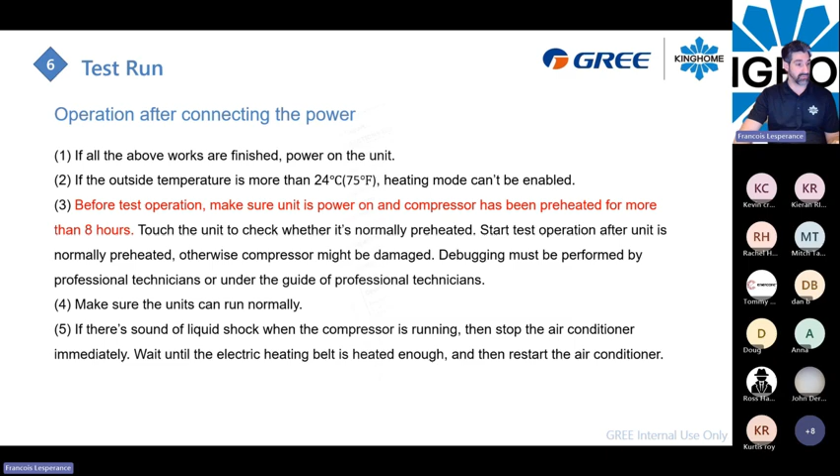Other thing, when it's minus 15 degrees Celsius, the cooling mode is disabled as well. So you will not be able to use the cooling mode at minus 15 degrees. Yeah, that's it for this morning. You can have access to a startup report sheet too. It's always good to have your model, serial number, matching all your stuff.

I got a quick question. Before, in the red, it said that you have to preheat it for 8 hours. Is there like in the warranty where it's going to void it if it wasn't run for 8 hours, because it's not going to be run or heated up for 8 hours? No, it will not, but it's highly suggested to just make it warm before you start it.

So manufacturer tells 8 hours to avoid any kind of issue, well, if it's like minus 30 outside, maybe it will take you a couple of hours for the compressor to be warm enough for the startup. So if you can connect it already on the first part of your day, well, do it. Because you need to feel it warm with your hand before you start it.

So if it's summertime, well, it doesn't matter, you don't have to plug it in 8 hours before. But for example, if you do like a 2 day installation because you have a lot of stuff to do and it's very cold outside, I suggest you start with the power for the outdoor unit. So you can just connect it and forget about it, do the rest of the work, and the second day when you go and make the startup, you are assured that the compressor is warm enough.